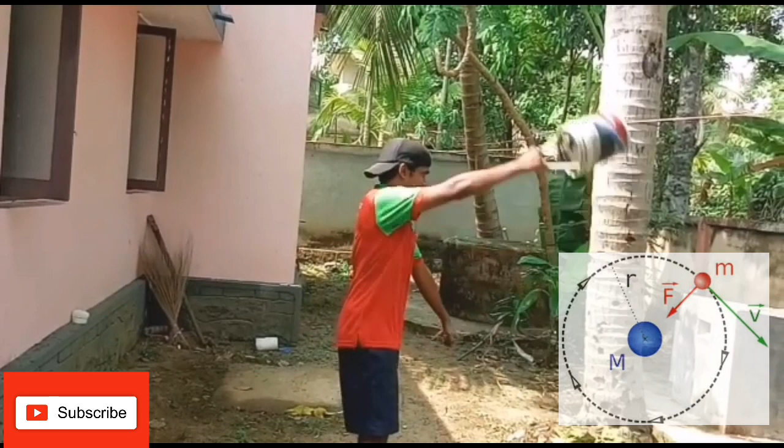I am going to show you a practical demonstration in which first I will rotate an empty bucket, and later rotate a bucket filled with water. Then we will examine the centrifugal force created by the empty bucket versus the filled bucket of water.

This is the centrifugal force formula: mv squared divided by r. We know density equals mass by volume. The empty bucket isn't truly empty, air is present in it. Notice I am using the same bucket for rotating air in the empty bucket and for rotating the water in the bucket.

So obviously the volume remains the same in both cases, rotating air as well as rotating water under centrifugal force. From the equation it's clear that density is directly proportional to mass. We know the density of water is 1000 times the density of air.

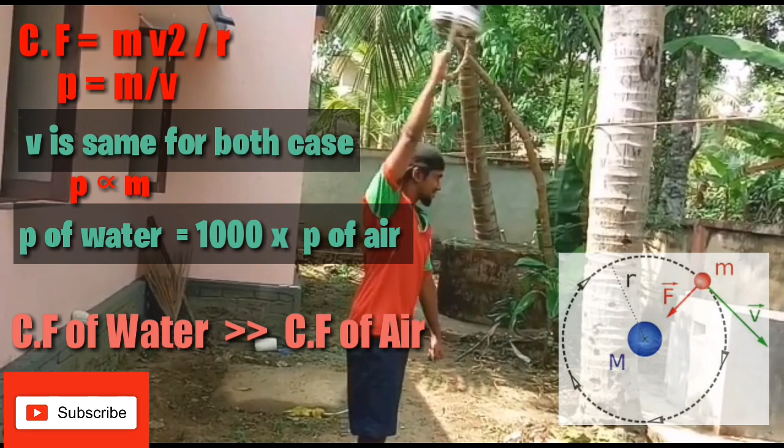As density is directly proportional to mass, the centrifugal force will also increase, since centrifugal force equals mv squared divided by r. So we can conclude that the centrifugal force created by water will be very high compared to the centrifugal force created by air in the empty bucket.

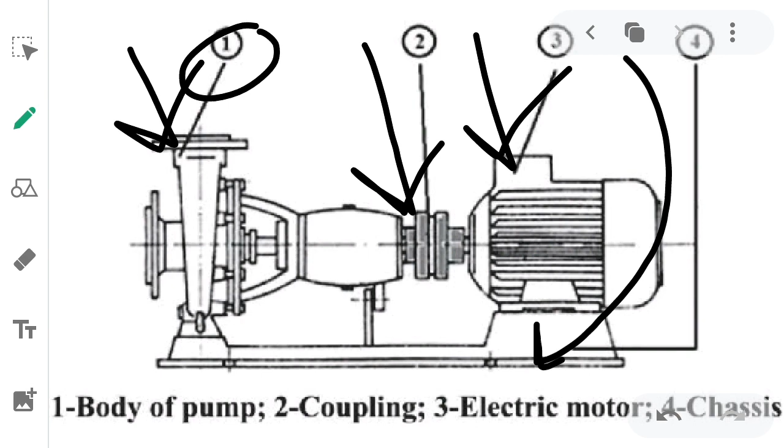This is the basic arrangement of the centrifugal pump. Number 1 is the body of the pump, number 2 is the coupling which couples the electric motor and the pump, number 3 is the electric motor, and number 4 is the chassis. This is the working arrangement of the centrifugal pump.

So guys, let's discuss the parts of the centrifugal pump. You can pause the video and see them clearly. The main parts are the volute casing, impeller, eye of the impeller, suction pipe, discharge valve, strainer, and foot valve.

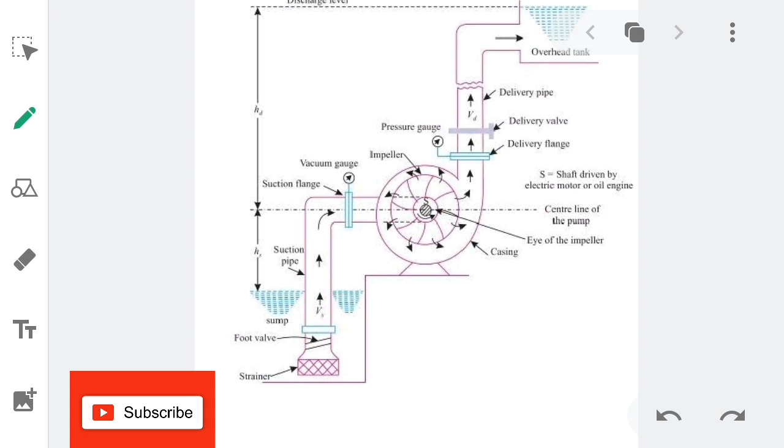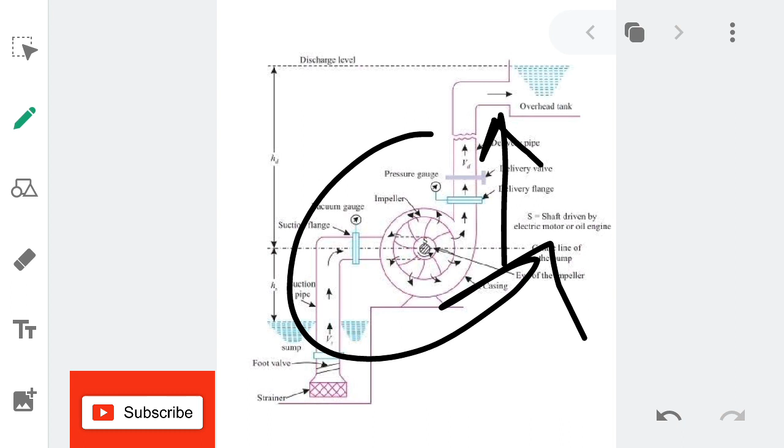During normal operating condition, when the impeller rotates, it creates a centrifugal force. As this force is created, the water is pushed out of the discharge side. As water is pushed out, a vacuum is created at the eye of the impeller, creating a lower pressure side. The higher atmospheric air pressure then pushes the water inside the suction side.

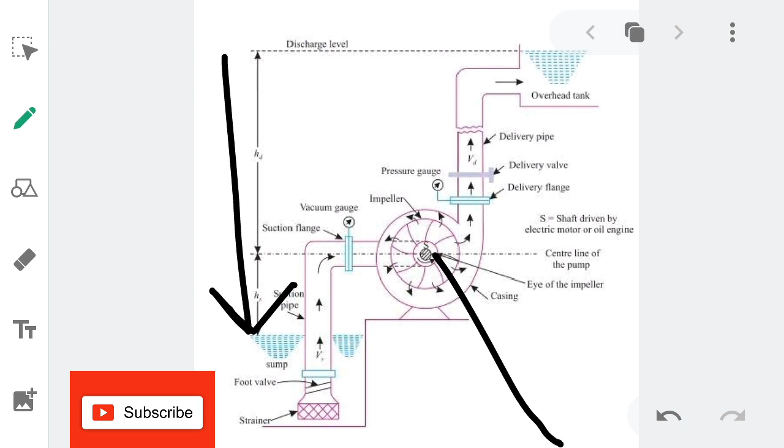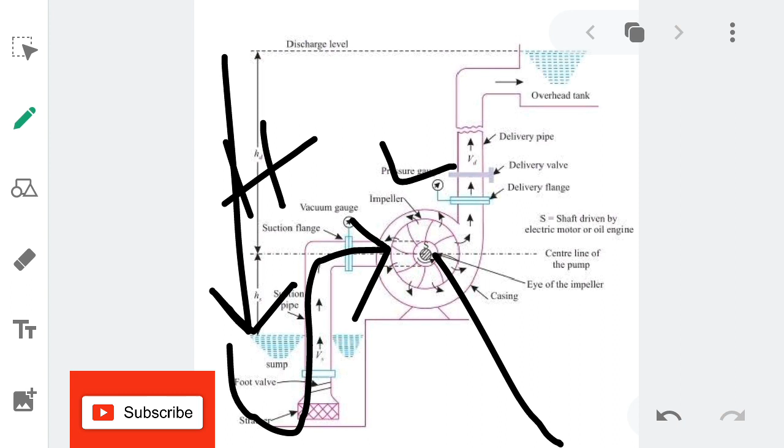Water is pushed inside the suction side toward the lower pressure region, from high pressure to low pressure. So water moves toward the eye of the impeller, which imparts kinetic energy to the water. This kinetic energy is converted to pressure energy by the volute casing.

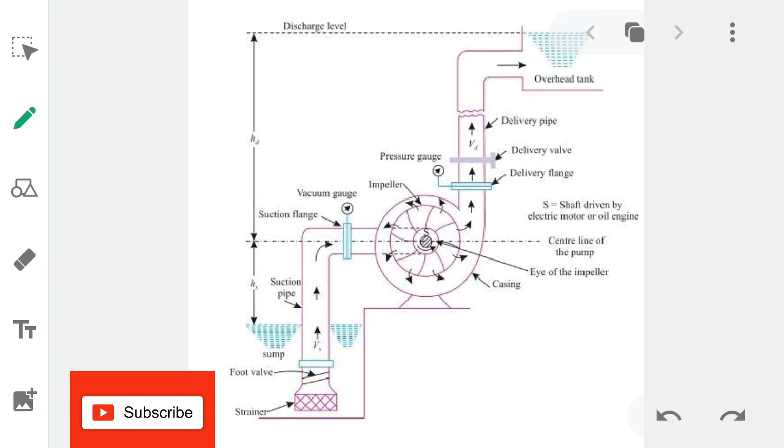The volute casing acts on the same principle as a diffuser, so a steady flow of water takes place due to the push and pull of water. The push and pull are related to each other, the amount of push force generated equals the amount of pull force generated.

Consider a centrifugal pump that is not started, it will only have air inside the casing. Once the pump is started, the air inside will rotate, creating a centrifugal force. This force will be very small since the mass of air is very low.

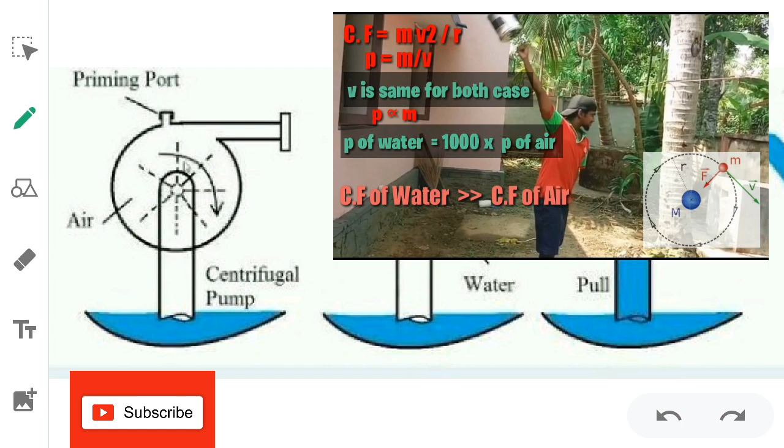As discussed, the density of air is 1000 times less than water, and density is directly proportional to mass. Since centrifugal force equals mass into velocity squared divided by radius, and the mass of air is much less than water, the push force generated upon rotating air will be very small.

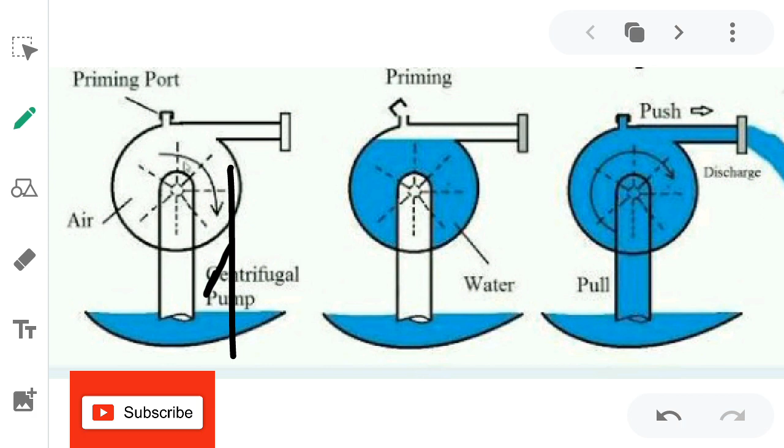As push force and pull force are related, the pull force for pulling water inside the centrifugal pump casing will also be very small. Since the pull force is much less than needed, the water in the sump won't get inside the eye of the impeller.

Since the push force is less, the pull force will also be very less, as push force and pull force are related to each other. So we need to prime the centrifugal pump casing.

A priming port is arranged, and water is transferred into the casing of the centrifugal pump. Once the pump starts rotating with this water inside, it creates a tremendous amount of centrifugal force, since the mass of water is high, and the density of water is 1000 times more than air, generating a huge push force.

As push force and pull force are related to each other, when the push force, that is the centrifugal force, is very high, the pull force is also very high. So the water is pulled inside the casing and pushed out, giving a steady flow of water once the pump casing is primed during startup.

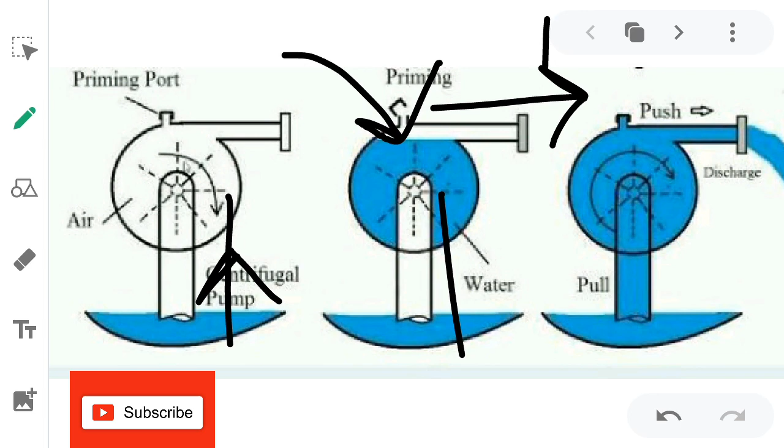I hope you understood the concept of priming, the significance of priming, and my practical demonstration. I hope this video was really useful for you guys.